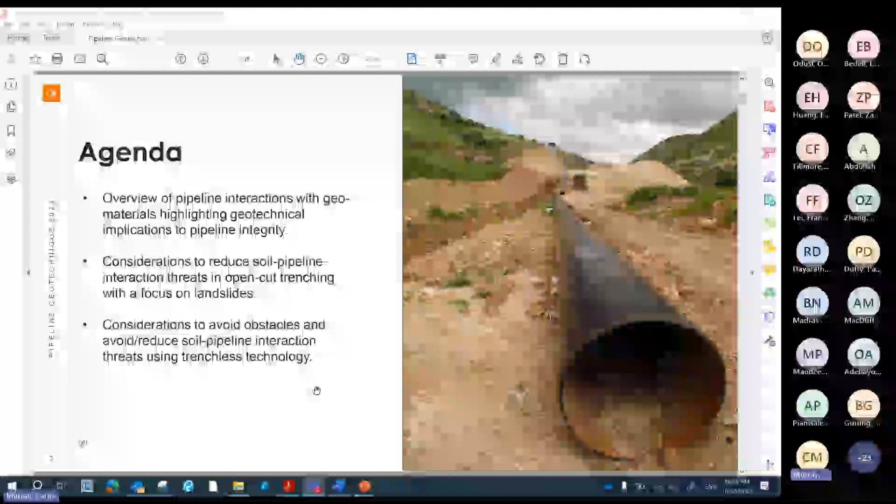So today, because the topic is quite broad, I've got the focus of the talk looking at an overview of pipeline interactions with geomaterials, highlighting geotechnical implications to pipeline integrity. And then we're going to look at considerations to reduce soil-to-pipe interaction threats in open-cut trenching, with a particular focus on landslides. And then looking at considerations to avoid or reduce soil-to-pipeline interaction threats using trenchless technologies. So that's the goal for the talk today.

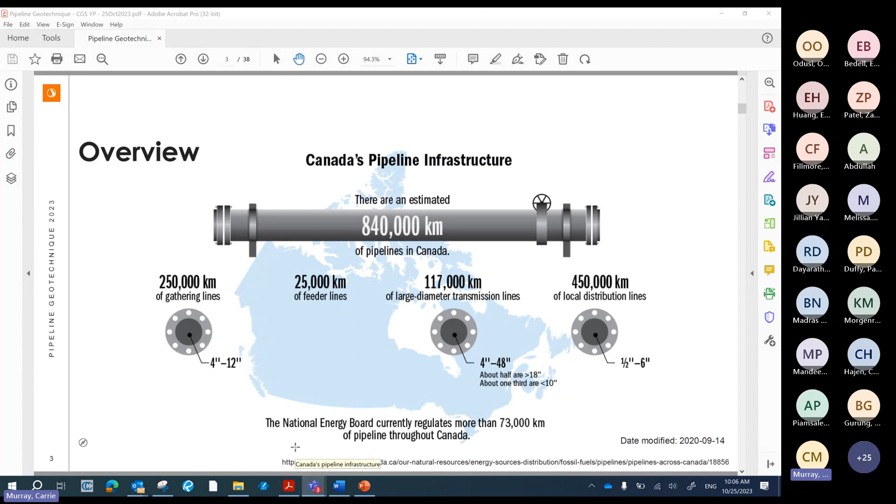So just an overview of Canada's pipeline infrastructure. This was published in 2020. To date, in that year, there was up to 840,000 kilometers of pipelines in Canada as an estimate. So I did look it up. It would go around the moon and back with some pipe left over. So there's a lot of oil and gas infrastructure in this country. More has been built since 2020, and it gives us geotech engineers a really interesting place to practice our profession.

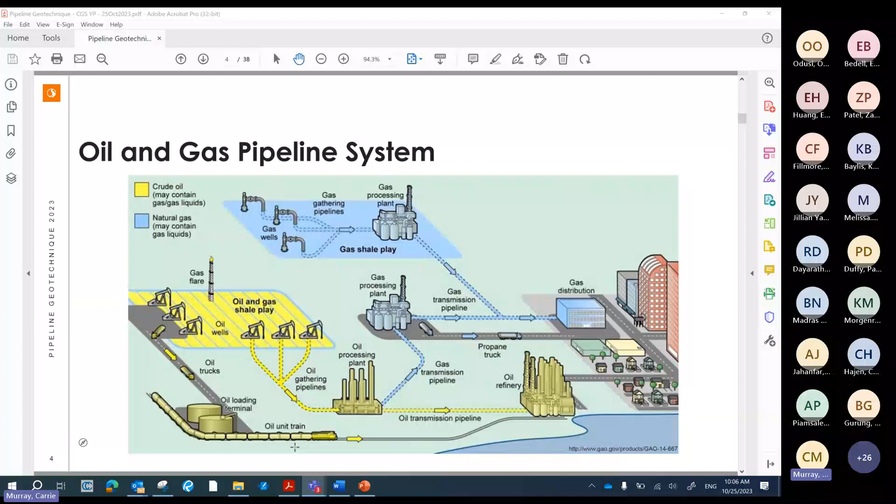And also not to forget that there are other buried pipelines around that aren't just oil and gas. And so the same principles apply to all pipelines, whether it's electrical conduits, telecommunication, sewer and storm lines, water infrastructure, reclaimed water, irrigation. There's even a beer pipeline in Belgium.

So they have a 3.2 kilometer long stretch of pipeline that heads from a brewery in an old downtown area off to their bottling factory. It was built in 2016. It's just a little fun fact of what you can put in a pipeline.

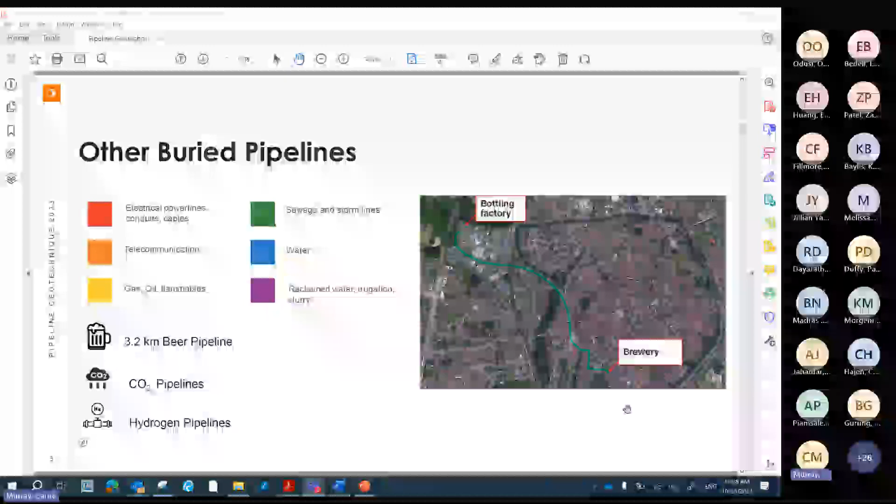We have the climate change actions with CO2 pipelines coming on board for carbon dioxide sequestration. There's the energy transition that's happening, so potentially hydrogen pipelines upcoming. So lots of commodities can be put into pipelines.

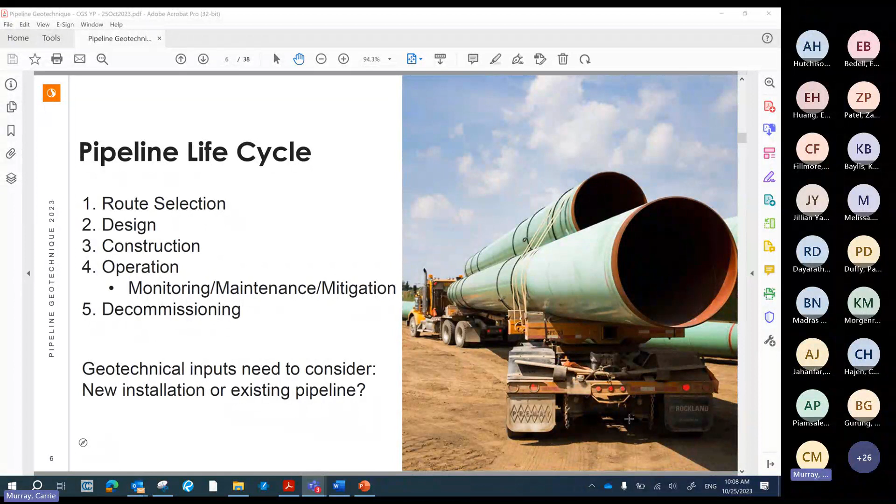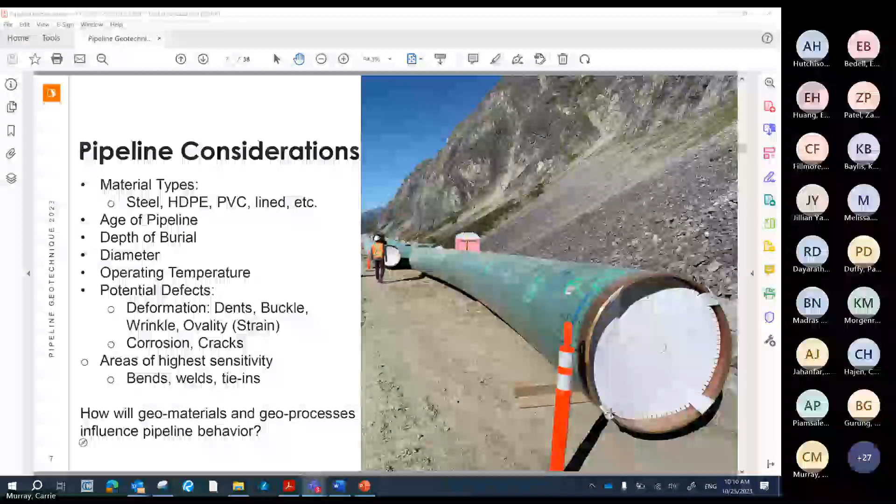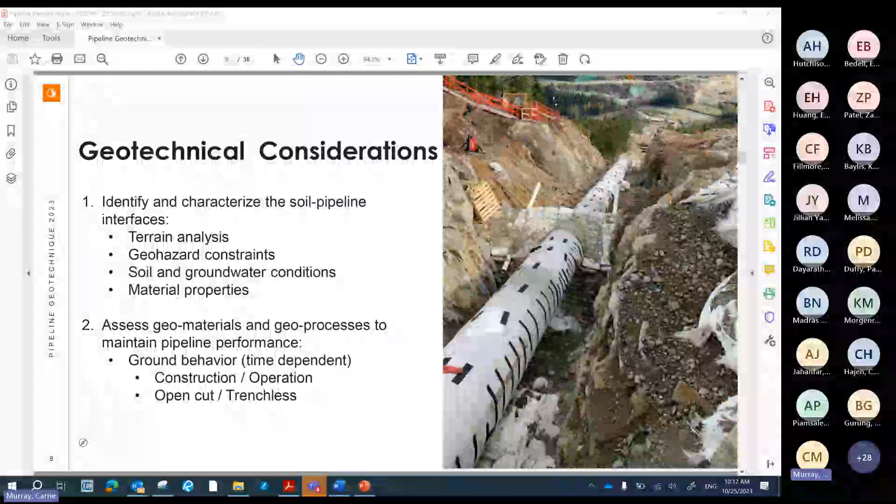And then looking at the geomaterials and processes to maintain long-term pipeline performance. So this is really a consideration of ground behavior as it will interact with the pipeline. And so this is observed in the construction and then through operation phases, and could be different whether there's an open cut environment or a trenchless burial that has a greater depth of cover.

So then looking at the terrain analysis piece to characterize the ground conditions along the pipeline alignment, using all kinds of different tools these days. So the ortho imagery and LiDAR and air photos and all of that work is used to pull together some mapping using GIS-based systems, where you can come up with terrain polygons that are then assigned a material type and parameters as well.

And then once the terrain analysis piece is done, the geohazard constraints are then mapped out. This can be a desktop level that then is ground truthed, but pulling out the constraints that need a little more focus from the pipeline designer and throughout construction, or perhaps it's remediated early in the route selection stage. This is a really important consideration.

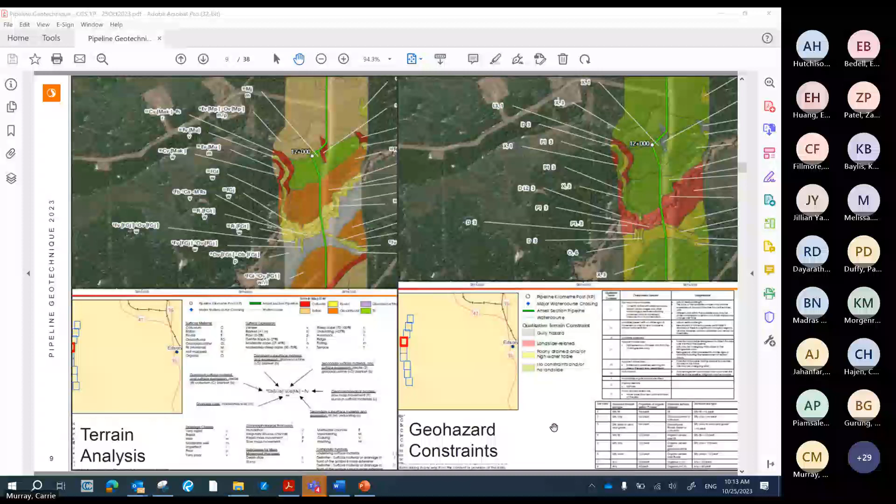And so LiDAR imagery has really changed the way we do business these days, and has popped out these geohazard constraints for us in a really obvious way. I remember in undergrad taking terrain analysis with Carl Sauer at the University of Saskatchewan, and his whole goal of that full year course using stereoscopes and air photos was to identify landslides.

And so we didn't have the opportunity to use LiDAR back then, but now it pops out so dramatically, and we see the satellite imagery compared to LiDAR, and then we can pull out different features that could be important to a pipeline right away. So on the lower left, seeing the vegetated slope in the satellite imagery just really pops out to show a landslide on this little river valley, and in all the undulating topography. So looking at these images is a really important step.

And also to not narrow your focus to just the right-of-way for a pipeline. The pipeline owner will get a narrow strip of land so that the pipeline can be constructed and maintained, so it can be a few meters to 50 meters. And so when we are doing our terrain assessment and characterizing landforms and materials, our inspection needs to go a little further beyond that. So when you're obtaining LiDAR and imagery, that's something to keep in mind, that if there's something going on outside of the right-of-way that could in time affect the right-of-way, it needs to be identified up front so that it can be addressed.

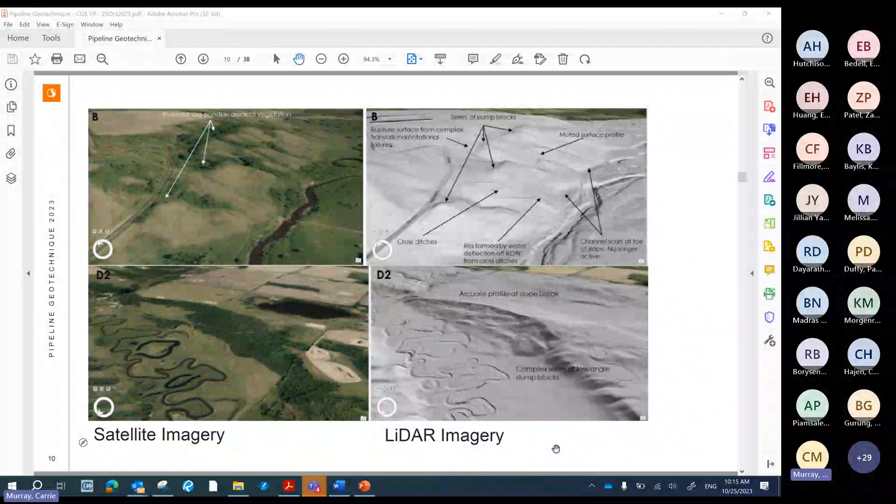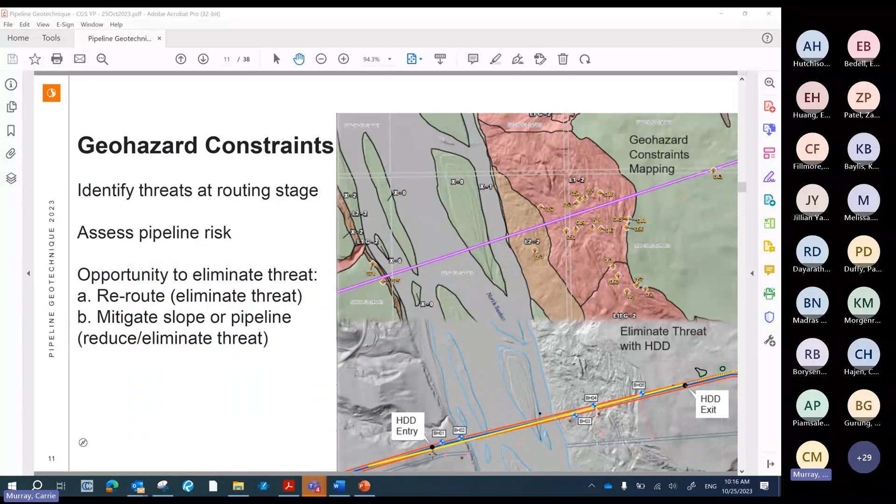So then looking a little further at geohazard constraints, right at the routing stage to assess pipeline risk, it can be an opportunity to reroute the pipeline if we're early enough in design. This is showing a river crossing and there's a big landslide slope off to the right that's colored in red and orange. And so if an initial design was going through a highly active area or potentially considering trenching up a valley slope, this is the opportunity to avoid this, either with a reroute or lowering the line and doing a trenchless crossing. So perhaps a horizontal directional drill as shown here in the bottom image, so that the threat could be eliminated, so that you totally avoid that feature.

So then looking at the soil pipeline interfaces, what ground conditions would result in high construction costs or high maintenance costs? And this is where geotechnical engineers could really provide value to the owner. And so early identification, assessing and mitigating these is the goal. So what is the groundwater level? Is it within trench depth for the pipeline? Will dewatering be a big issue? Is the pipeline ascending a steep slope? What are the issues there related to rockfall and safe excavation, construction and entry?

And then a big landslide. So the lower left image is showing a high headscarp of a landslide. Is it active? Can it be avoided? Or cobbly terrain too. So some tills are particularly cobbly, and identifying them in our desktop terrain mapping as a moraine or a till is usually considered a favorable pipeline construction situation, unless you're in a bouldery, cobbly kind of till. And then there's a lot of extra construction cost with getting rid of the bigger clasts and trying to get sand bedding in so that there isn't point loading of the pipeline on these bigger rocks and boulders.

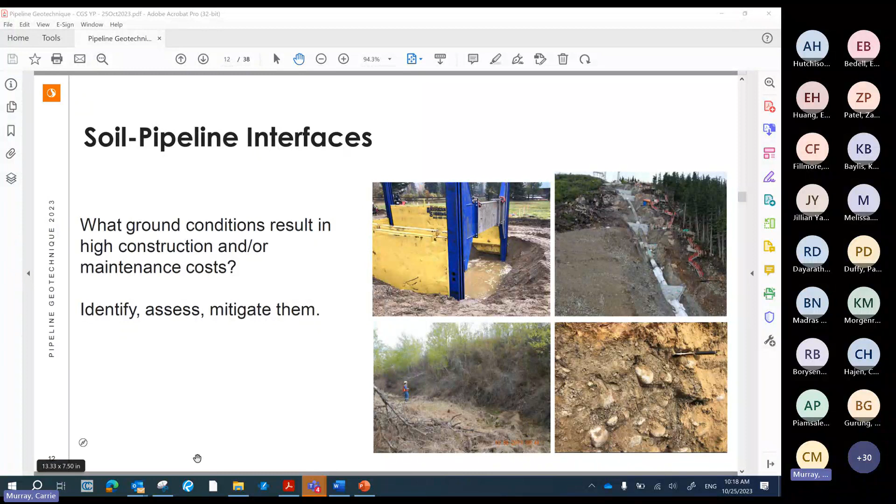So there's a whole host of situations that could affect either the pipeline construction or its long-term operation, and that's where we get hired to help out. And then the list is here, and it's not exhaustive, but as the terrain mapping is identifying wetlands and landslides and through mountainous terrain, glacial marine clays affecting Quebec or the coast of BC in the north, that cobbly moraine, as I said, permafrost, fault seismicity, any of those terrain units will have sensitivities to the pipeline.

Weather-related interfaces too, so construction seasons and big storm events or erosion, and those kinds of considerations can really be a driver on cost and how the ground will behave under those big weather events. The right-of-way configuration too plays a really big role in how the pipeline interacts with these terrain units. And so situations often arise where you can't put the pipeline exactly where you want it, and you're forced to run in a certain orientation on a landslide or a ridge crest or such things.

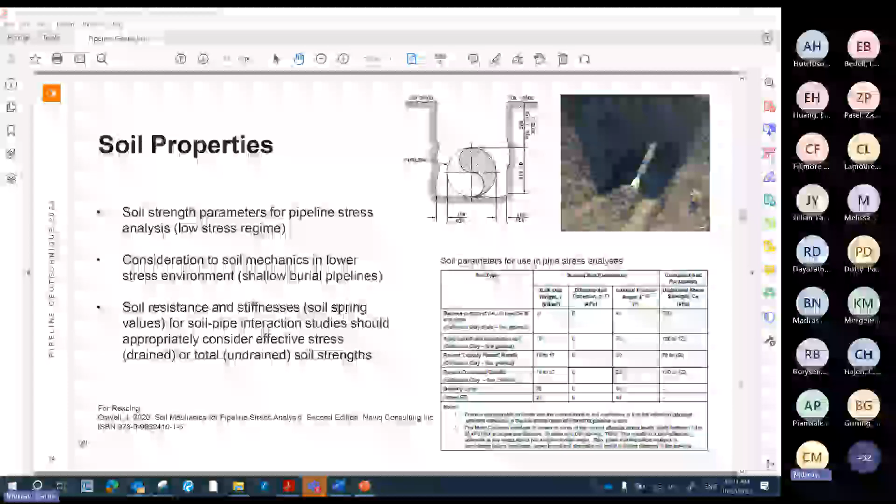So then looking at the soil properties, those themselves are required by the geotechnical engineers to be used for pipeline stress analysis. And where these are used, the pipe stress engineer will run this analysis at design, when the pipeline has been as-built after construction, and then in special conditions such as during the maintenance phase, so in integrity digs or perhaps a pipe stress relief due to landslide movement.

So there's some key points to make here: generally in a trenched excavation, a shallow burial of pipeline, we're in this low stress regime. So consideration to soil mechanics in this lower stress environment is required. For example, if you can recall the stress strain curve, it is non-linear in the low stress regime. So it will give you a higher strength, so higher friction angle and no or little cohesion. So the parameters that are provided are not conventional to what we would typically do for foundation projects, for example.

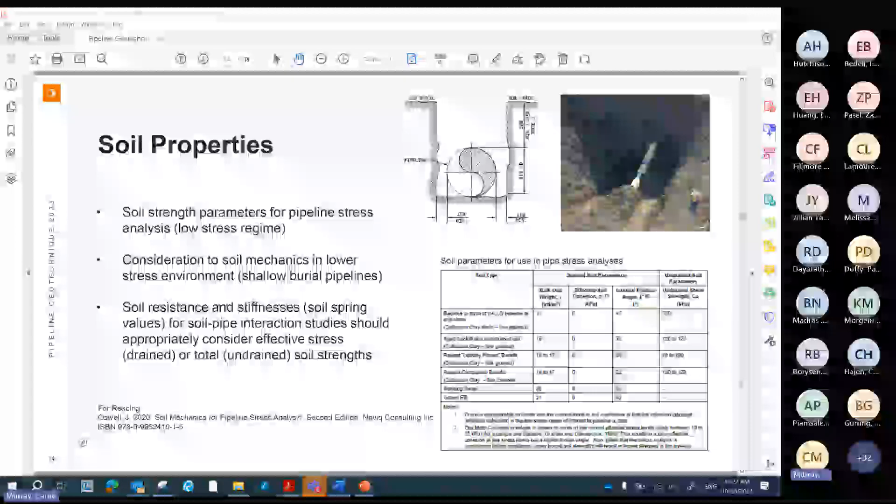So this specific area does require some extra reading by us classical geotech practitioners. And Jim Oswell has basically written a book on this. He literally has. It's called Soil Mechanics for Pipeline Stress Analysis. He's got the second edition out in 2020. And so I would encourage you to read that and reach out to the other professionals that are working in this field, because it is slightly nuanced and needs some special consideration.

Oops, sorry everybody, I clicked the wrong thing here.

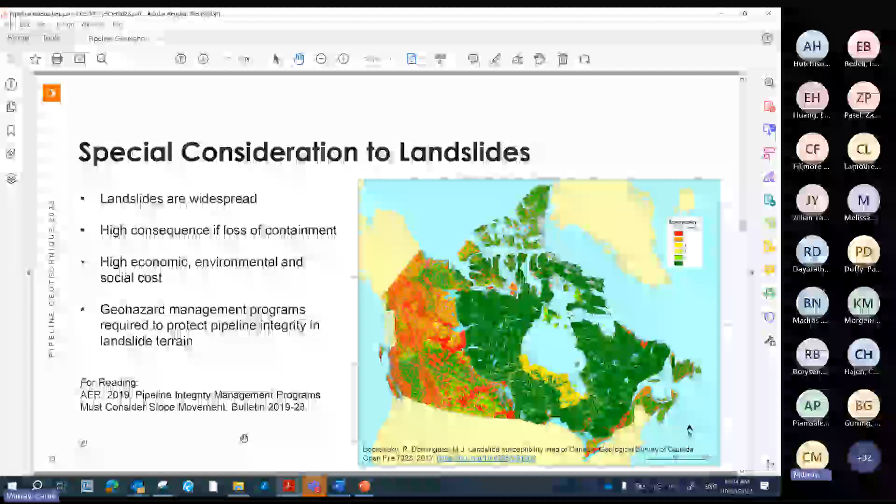Because if a landslide movement happens and interacts with the pipeline, there is a pretty high consequence of a spill due to loss of containment. Costs then become really high. There's environmental and social costs, and oil and gas pipeline operators are doing what they can to safeguard their pipes, which requires a geohazard management program where we get involved, working with the pipeline integrity folks as a multidisciplinary group. And specifically, I called out this Alberta Energy Regulator bulletin that is highlighting integrity management programs for pipeline operators. That is an imperative to consider slope movement to avoid those loss of containment events.

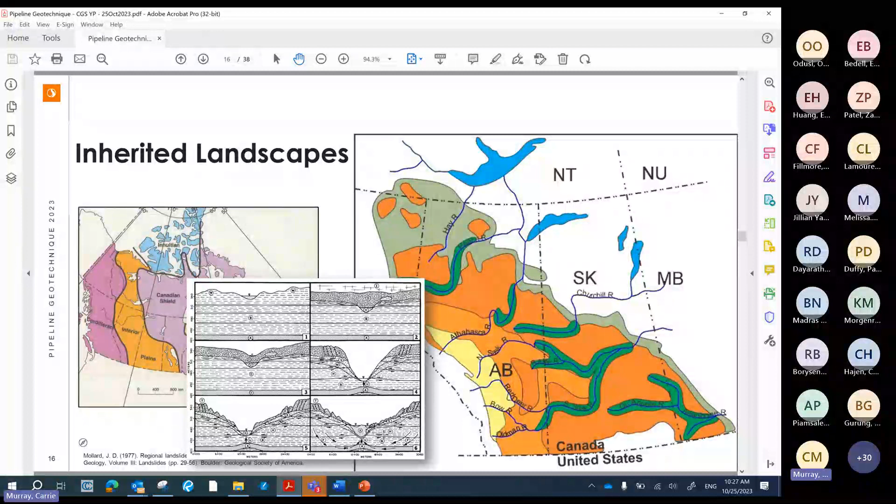And so today's situation in a lot of these river systems in the prairies are quasi-stable landslides. So sitting factor of safety around 1, and it doesn't take much to destabilize or to accelerate movement. So most of them are moving extremely slow, on the order of 10 to 25 millimeters a year, but a big rain event would be enough to accelerate that. And if your pipe is trenched in this kind of terrain, it will have an effect, a negative effect.

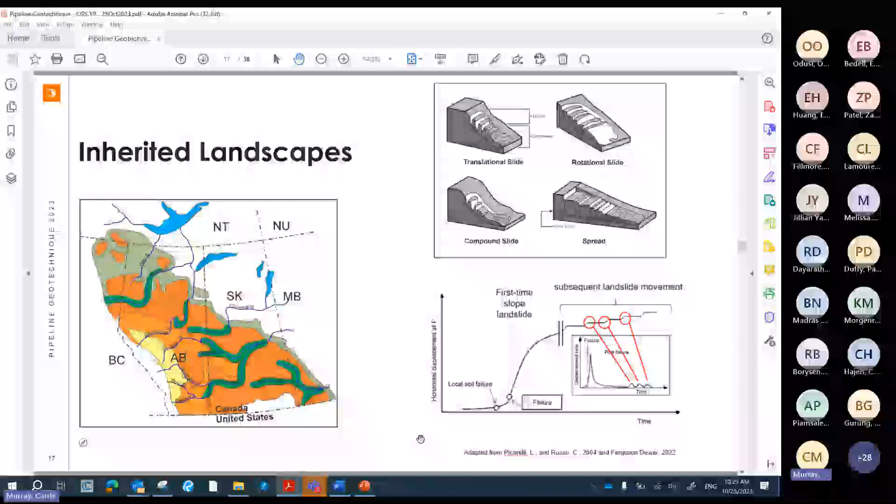And so showing the displacement versus time plot, the first time failure for these slides would have happened post meltwater flood out with deglaciation. And then movements are just continuing on. And then these subsequent movements that can be episodic happen with time and are somewhat unpredictable. So it creates this whole situation that needs monitoring and maintenance, and avoiding if we can, for pipeline alignments.

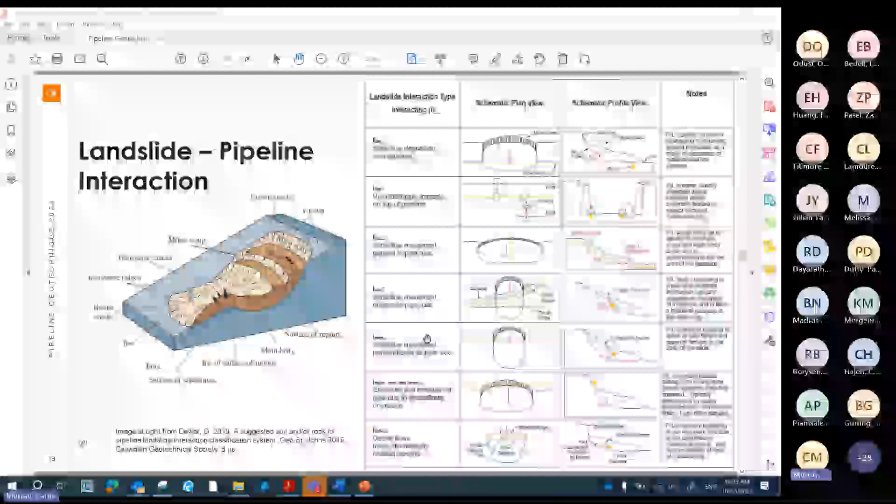So Doug Dewar created a nice summary of landslide interaction with the pipeline, and so how the pipeline is configured across the landslide tells us how it could behave if the landslide continues to move and affects it. And so this categorizing system can help us think about where the pinch points on the pipeline would be, what kind of mitigation measures could be used to either slow down the landslide or beef up the strength of the pipe. So this is a helpful reference. And then a few words here, but I would like to go through this with everybody about how the landslide pipeline interaction approach should go.

So it's a risk-based approach, a risk management way of dealing with these. So first of all, we identify the threat. And remember, it matters whether the pipeline has not been installed and it's new and we have the opportunity to reroute and avoid, or if it is an installed pipeline and now there's an issue. So there is a difference with what tools you have available. But identifying that threat, using mapping tools, field reconnaissance, geotechnical investigation, we want to find out what that activity state is for the landslide. Is it moving? How fast is it moving? How big is it? How deep is it? Those characterization kinds of things.

And then assessing the consequence. So the extreme case is a loss of containment event. But there are other consequences that could happen, and depending on the magnitude of the landslide, it's something to consider. And then likelihood as well, assessing that. So there's a large uncertainty in our ability to assess how likely a landslide is to move, especially in the prairies, because it could be episodic. We're unable to have certainty with the landslide terrain.

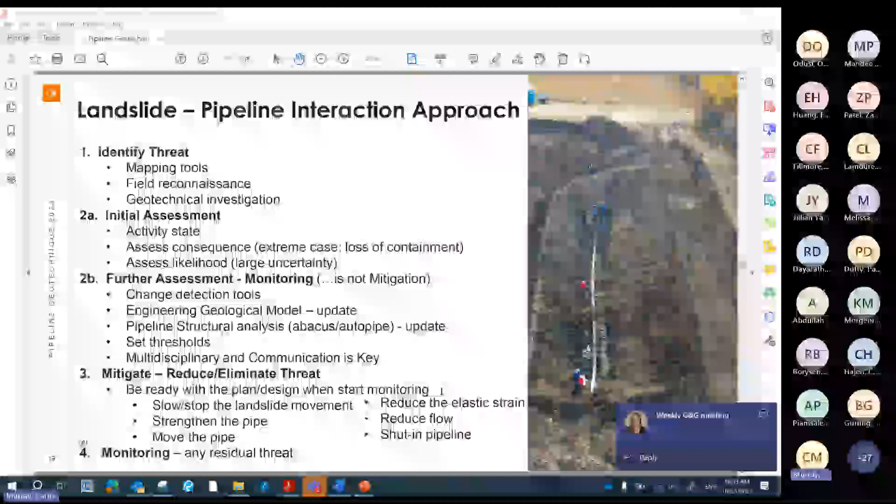So then having the operator ready with the plan and design at the time of monitoring, instead of waiting for thresholds to be met, is a better approach to risk manage the pipeline. So getting that in the process is pretty critical. So either considering how to slow or stop landslide movement.

Lots of ways you can do that. It's very much a case-by-case basis, but the basics are you reduce the driving forces and increase the resistance. You can strengthen the pipe, move the pipe, so a reroute or an HDD, a trenchless solution, or reduce the elastic strain on the pipe by stress relief.

You can reduce product flow if things are getting a little critical, so if loss of containment happens, the impact isn't as massive, or completely shut in the line. So there's a whole bunch of options that can be considered. And so the point is these need to be addressed right when the threat is identified. And then once the threat has been mitigated, there's monitoring for any residual threat.

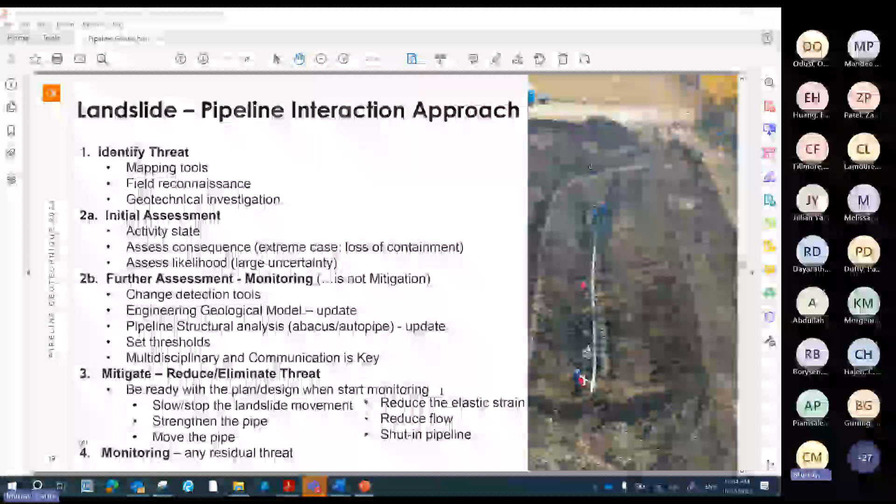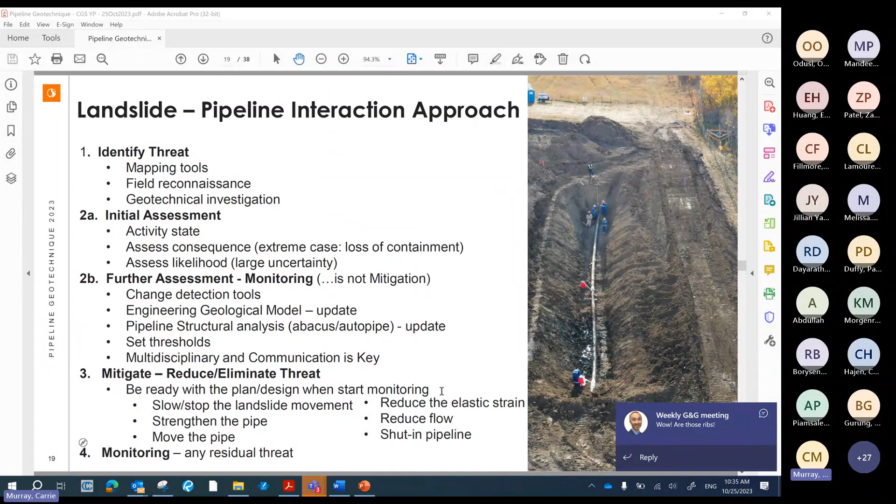So it is an important approach, and one that needs educating sometimes with the owner, if this is the first time for them dealing with this situation. So to understand this in our role is key. So looking at monitoring a little more holistically and using change detection with the various monitoring tools becomes a pretty critical piece of the puzzle here.

So we can monitor the landslide by our conventional slope inclinometers. We can near real-time automate those with shape accelerometers or in-place inclinometers. We can monitor groundwater levels, standpipes, or vibrating wire piezometers. We can use survey monuments, or near real-time monitored GPS units can be installed for the near-surface movements and can be moved to characterize the whole landslide.

The site reconnaissance, so doing a walkover of the slope periodically or at triggered events, becomes an important thing. There's an art to this, so it's not all just data coming back. We're pulling in some important observations when we do the field walkover. And then the pipe itself can be monitored by using inline inspection tools. They can be run down the pipeline, and in a simplistic form, it's like getting a slope inclinometer result out of the pipeline. So it's a super important tool, and the integrity team at the pipeline owner will be using these.

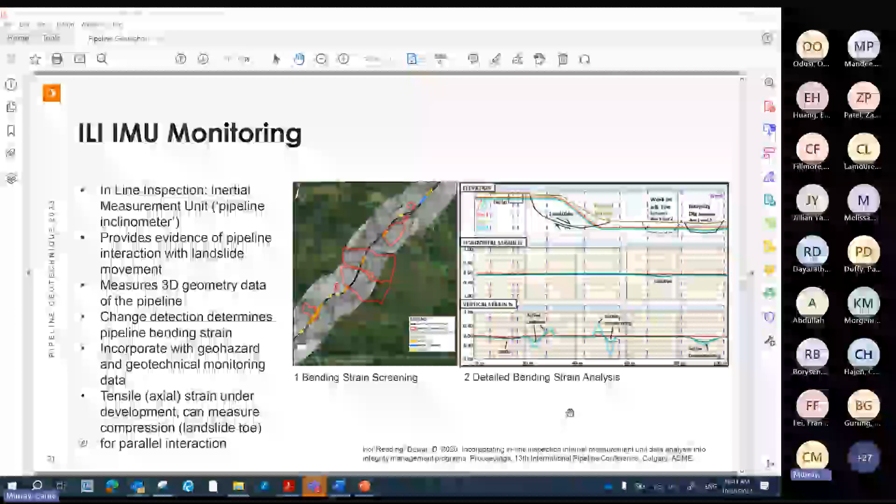So even without slope inclinometers and all the other geotech tools, this tool will tell you if there's a landslide affecting the pipeline. It can be a really good screening tool to figure out next steps, whether that's more geotech monitoring or initiating it, or another integrity option. And then looking at the configuration of the pipe running through this landslide: if it's running parallel or oblique to it, that will affect the bending strain and where it's happening on the pipe. So an understanding of that is required.

Tensile movement or axial strain is under development with this tool, but it is coming. This tool can measure compression. So for that parallel interaction, because we often orient pipelines parallel along slopes, finding the tension areas is coming.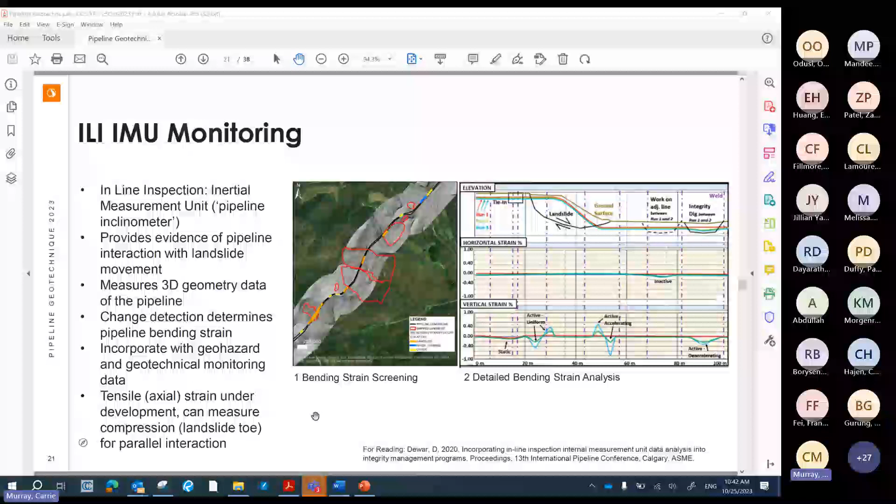So this pipe was trenched in the slope, and then an HDD at the toe of the slope, which isn't recommended anymore. Doing an HDD at the toe of a landslide slope creates an anchor point here. There were lots of reasons this happened in the past, primarily not recognizing landslides properly and limitations of trenchless equipment. They couldn't do big, long drills; they could only do short ones early on.

So the outputs of this analysis show a compression strain event, where the landslide movement is concentrating strain at this overbend, and the prediction of how much movement it could take was such that we had to shut the pipeline in this case. So anyway, just to show the importance of modeling, outputs, predictions and thresholds, and that scenario you can get into with landslide monitoring.

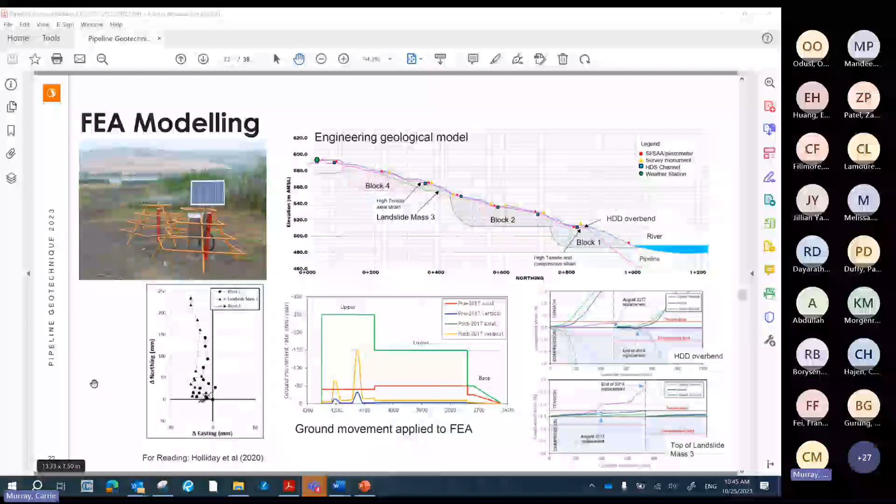Okay. So switching gears a bit to talk about trenchless crossings; it's another place where pipeline operators spend a lot of money. One is landslides for sure, and the second is crossings. Trenchless crossings are typically done to avoid obstacles, surface features that are in the way of a pipeline right-of-way, such as railways, roads, rivers, even congested sites that would be a real pain to open cut. This is particularly in urban areas, and even environmental or historical resource sensitive areas, where instead of open cut, we could bury the pipe with trenchless methods so that we don't disturb the ground surface. So lots of reasons you would use a trenchless crossing.

There are some advantages over open cut, and I mentioned a few: reducing impacts on the environment, and the social cost of people having to travel around open cut construction. There's a big footprint with that. And if you're crossing rivers, including the slopes, you don't have to deal with trenching up slopes and the issues that can cause. There's less equipment, personnel and fuel needed, so costs are affected by that, and the surface restoration costs would be less.

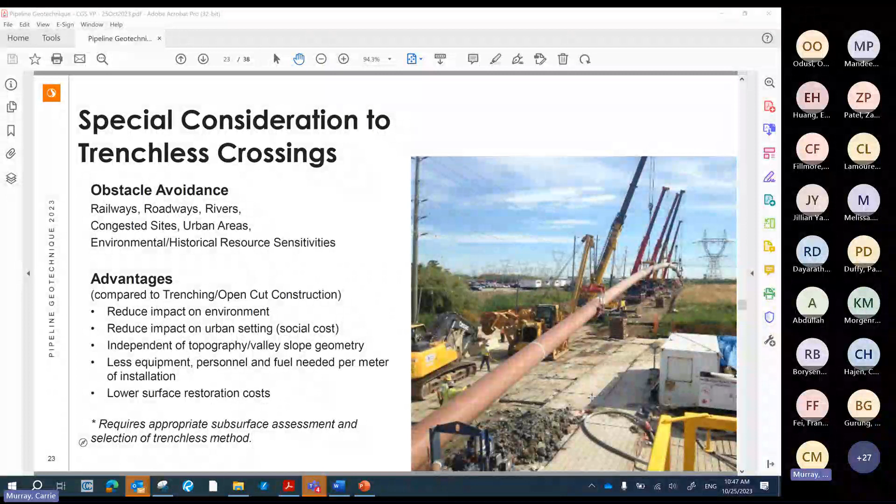So the trade-off is that we can bury the pipe and avoid obstacles, but you get into the underground space, which is where geotech engineers come in. We need a proper subsurface assessment, and then picking which trenchless tool is the most feasible method to interact with the subsurface ground conditions is the goal.

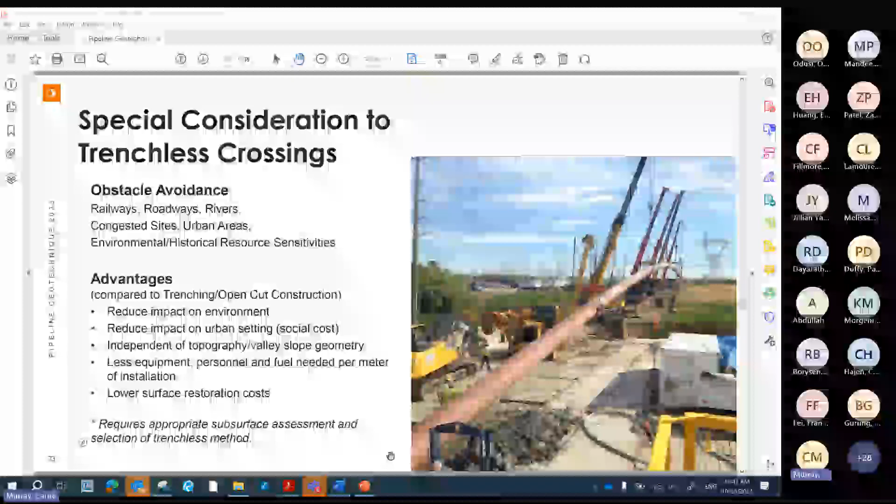So there's uncertainty in underground construction. The tunneling industry, I guess since people have been tunneling, have come across this, just unexpected conditions, and it leads to cost overruns and claims. And then at some of these obstacles, we can't even investigate the ground conditions below it. So like at a railway crossing, you can't drill a hole in the middle of the tracks to find out what's immediately under the tracks.

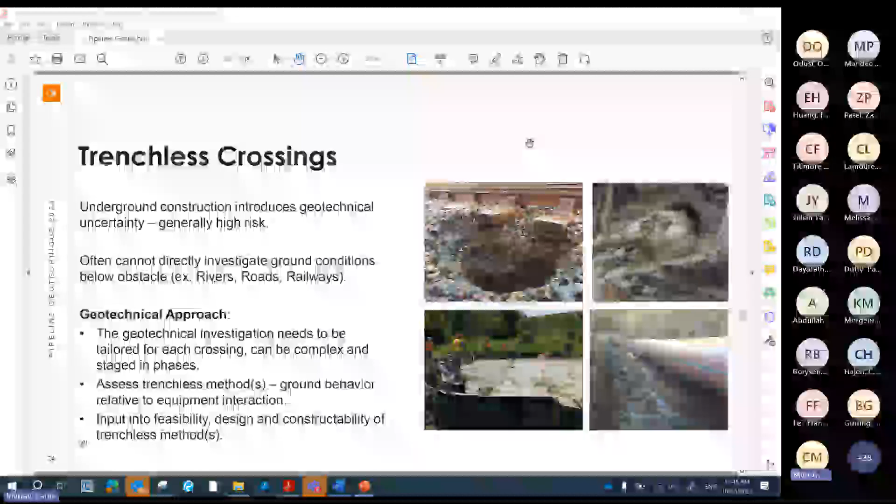And so there's some situations where you have to infer geology and rely on your desktop mapping abilities. And then at some point, you just have to accept some of the uncertainty as a risk to the project. So depending on the complexity of the crossing, the geotechnical investigation needs to be tailored for that. So if it's a short rail crossing that's 60 meters long, then 2 boreholes would be required. But if you have an over 2,000 meter river crossing, then that won't suffice.

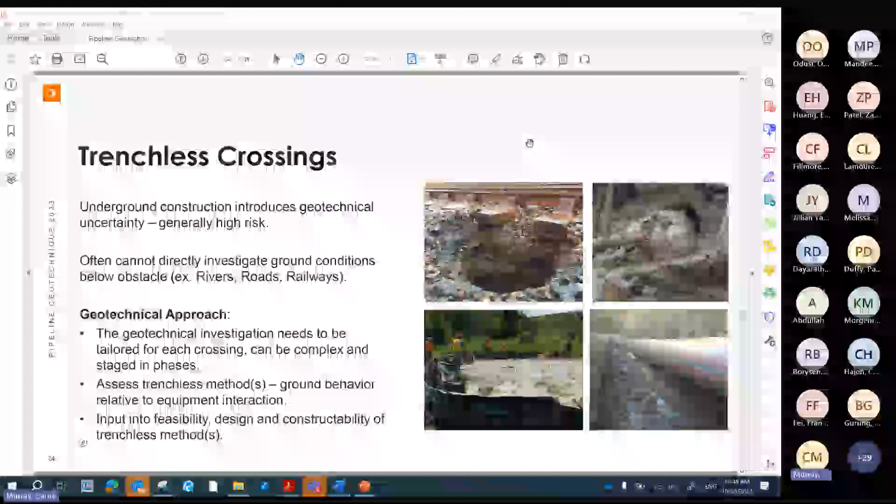And then assessing the methods, as I mentioned: how is the ground going to behave relative to the trenchless method and the equipment that is used. And then out of that, we provide an input into feasibility, design and constructability of the method that's preferred, and if there's an alternate kind of method.

So what does that look like for us? It's coming up with the terrain and the subsurface strata. So looking at it in plan and profile again, just to make sure we understand the geological setting, where the hazards would be, coming up with geotechnical engineering material properties, and then classifying the ground behavior. They become really important inputs and things that we have to figure out.

And then rivers, like showing these images here, they're already complex terrain environments. And so, performing a deeply buried crossing under these complex features requires a good understanding of geology.

I have a comment here that geotechnical baseline reports may be useful. So they are used in the tunnel industry pretty pervasively and are being more and more adopted into these trenchless kind of utility and oil and gas scenarios. Not so much in directional drilling, but it is coming more. I've seen and been involved with more and more, but certainly in microtunnels, baseline reports are used, and they are essentially a risk management tool.

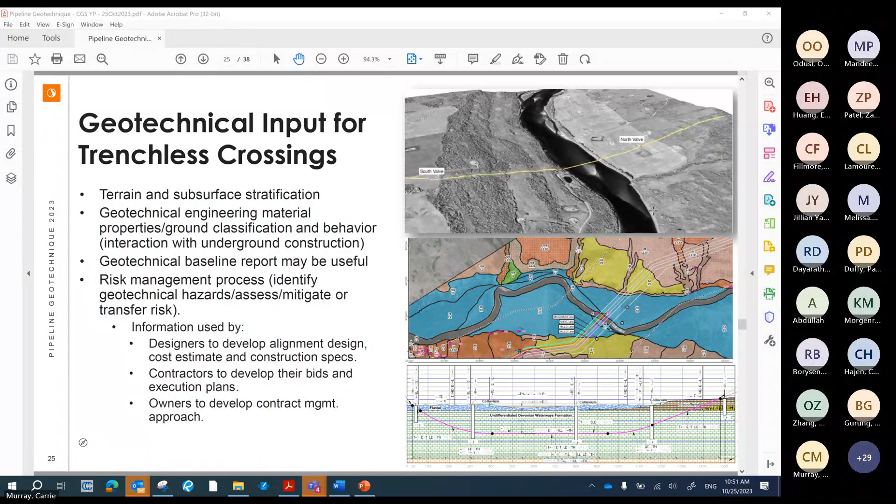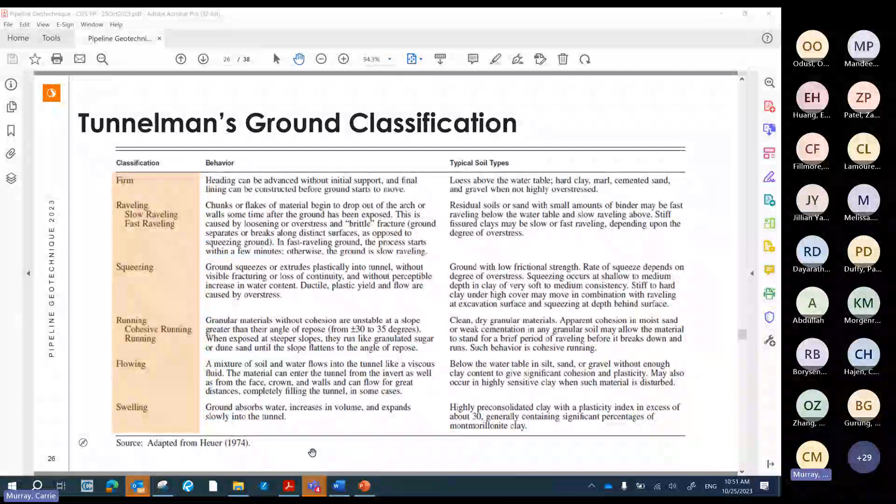So I put this up here just as I've been talking about ground behavior here and there in the presentation, and in the trenchless world, there's a Tunnelman's ground classification. It was originally proposed or developed by Terzaghi, and then Heuer in the 70s updated it. I have highlighted here ground classifications that help us describe behavior of what we would expect in an open bore in a trenchless crossing. And it will really affect how the contractor approaches their means and methods for constructing a trenchless crossing.

If the ground is firm, you expect kind of good tunneling conditions. Raveling can be problematic if it's fast, and then squeezing, running, flowing, swelling. There's descriptions there, but it all should trigger in people's minds that there's some things to be overcome if you encounter these kinds of scenarios with the ground.

So then looking at the methods themselves, geotech engineers aren't trained on what trenchless methods are in your classical education. There are a bunch of universities that do offer some of these courses now, because this is becoming more and more prevalent and something that we as practitioners are more and more dealing with. So this understanding is important for us because of what we have to recommend in the end. Is the method feasible? And then what are the bad actors in the ground that the contractor should be aware of?

So the methods listed here, we can think of them kind of as displacement techniques. So pipe ramming, so hammering; drilling techniques, so horizontal directional drilling. So that is more like a rotary drill.

If we're thinking geotechnical, like how we go and investigate the ground, there's methods broken up in the trenchless world that we can relate to straight off the bat. So pipe ramming is like driving a pile. Directional drilling is like a mud rotary system on a drill rig. And then there's these hybrids that I'll get to in a sec.

And the hybrid technique, there's one that's called Direct Pipe installation. It's a Herrenknecht trademark that blends directional drilling and microtunneling, and it's becoming more and more mainstream. And just a note that all of these methods can be used as a hybrid, and they're constantly evolving. So it's something, if you're involved in the industry, to stay abreast of. The contractors are always coming up with new refined tools to get the job done.

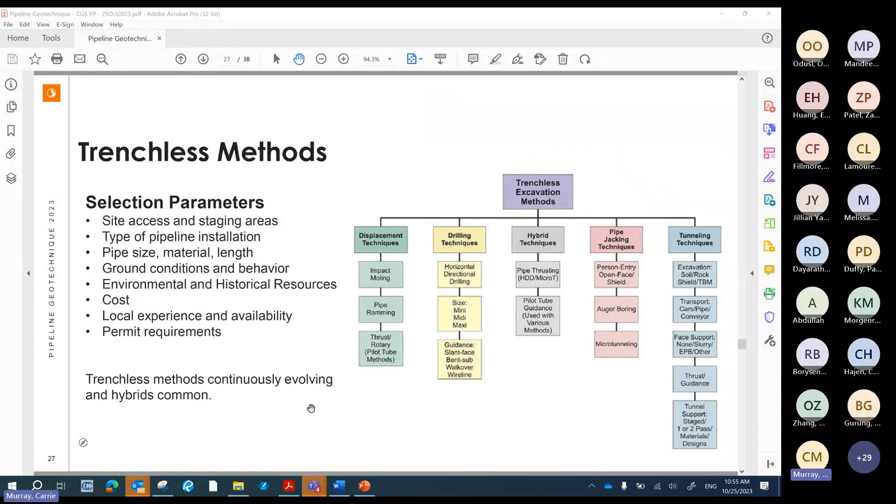So looking at the big three, directional drilling typically has a longer, deeper drill path. Microtunneling requires a shaft on each side with a straight shot to achieve the trenchless crossing. And then the hybrid is called direct steerable pipe thrusting, or the Herrenknecht trademark Direct Pipe. And it's a hybrid of the two.

So instead of a shaft, it's a surface launched microtunnel that can be installed on a curve like an HDD, and it's thrust from the surface and then advanced. The microtunnel boring machine is advanced and steered along a curve.

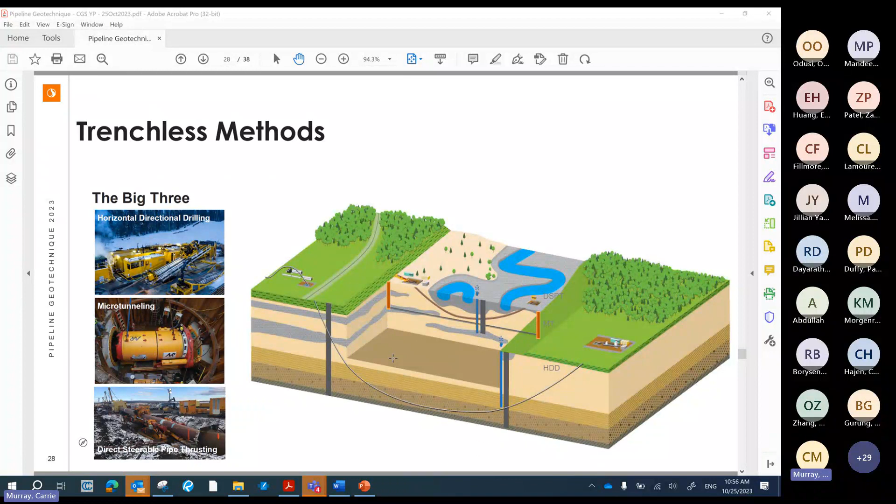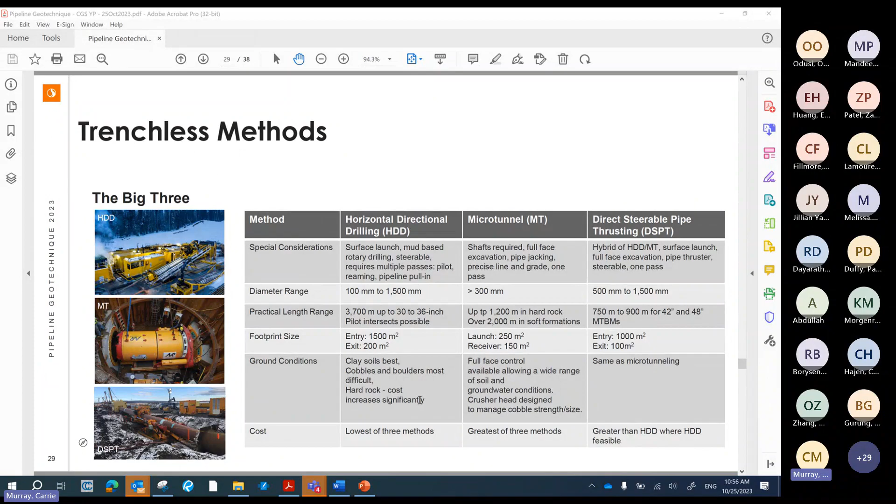So there's advantages and disadvantages of each. And these big three, as I call them, are the more expensive types of trenchless methods, and they have different ground conditions that they perform better in and not, and those are somewhat listed here.

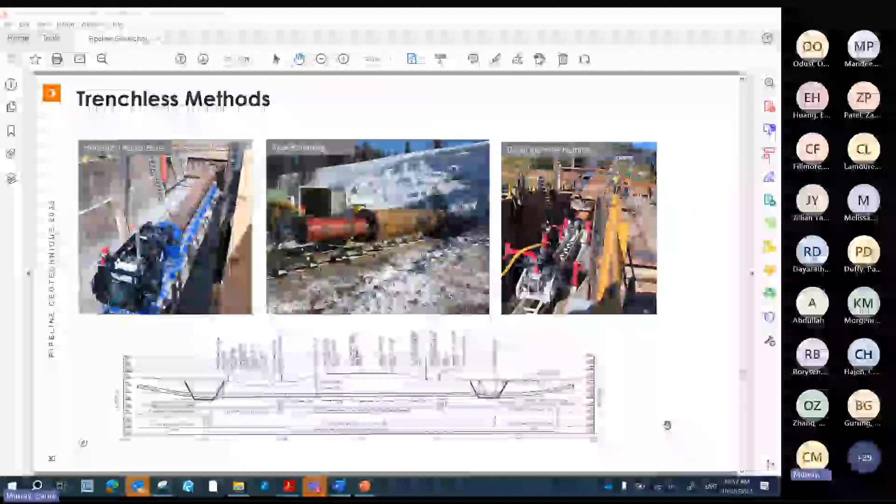We have three other methods. I just quickly highlight the horizontal auger bore, pipe ramming, and then a down the hole hammer. These are all launched from a pit, so it could be excavated, shoring, a small shaft. And the depth of cover can be pretty low on these. They're typically used for roads and railways. They're shorter than a typical HDD, so their maximum limits are like 60 meters for pipe ramming, and 100 or so for the auger bore and down the hole hammer.

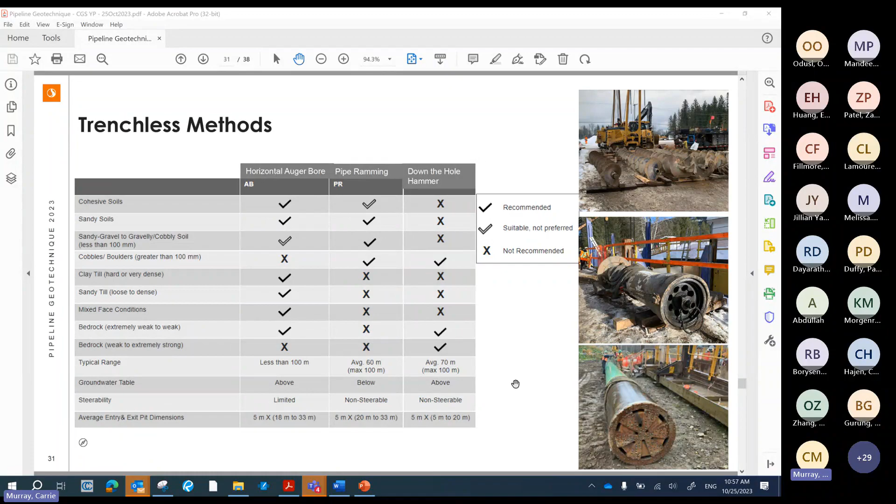And then ground conditions, so the selection is based on what we encounter in our geotech investigation and how the methods will perform in these scenarios. So pipe ramming does not perform well in clay soils or bedrock, but it's really good in gravelly soils, where other methods don't work well. So anyway, you need to understand both of them here, and I'm accelerating my pace, so please bear with me.

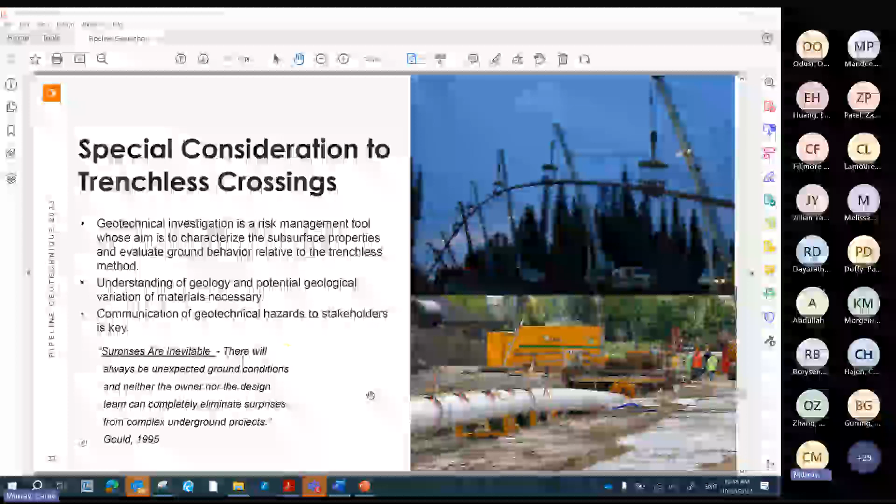So for the considerations to these crossings, our geotechnical investigation is a risk management tool, so we need to be characterizing subsurface properties and evaluating ground behavior. We definitely need an understanding of geology and the variation of those materials through the terrain we're working through, and then communicating those hazards to stakeholders. And as Gould said in '95, surprises are inevitable. So we're always going to have unexpected ground conditions that neither the owner nor design team can completely eliminate from complex underground projects.